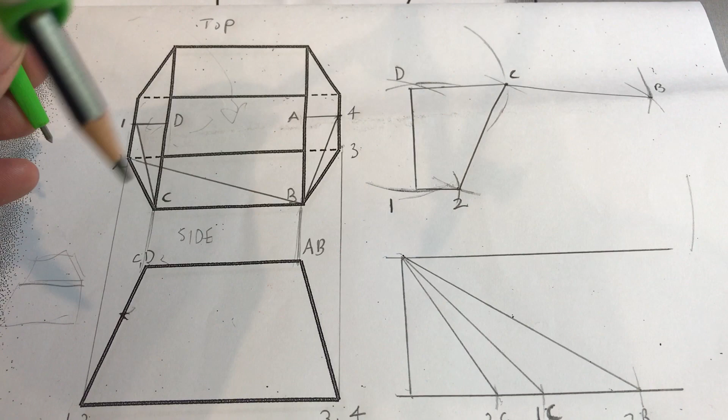Okay, it just becomes more and more convoluted. On these side views, I was saying your horizontals are verticals and your verticals are horizontals. But as you come around onto the other panels, that all switches around.

So you've just got to basically go from point to point and try and work out what are actual lengths and what are lengths that need to be transferred onto here to make them real lengths, okay, that are inclined planes.

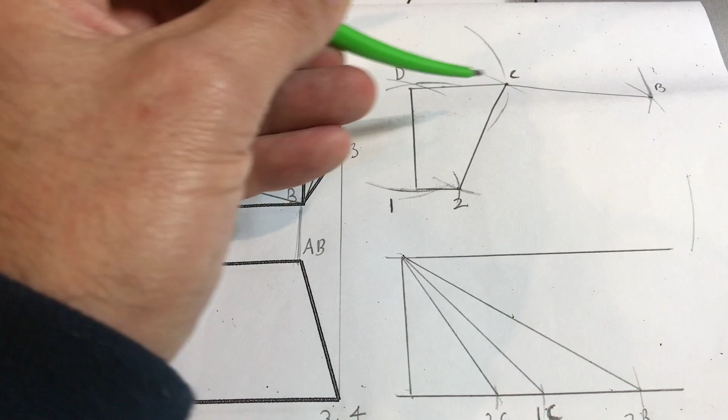So we've done our CB. We know that opposite CB we have this distance here, 2 to 3, which is a real distance.

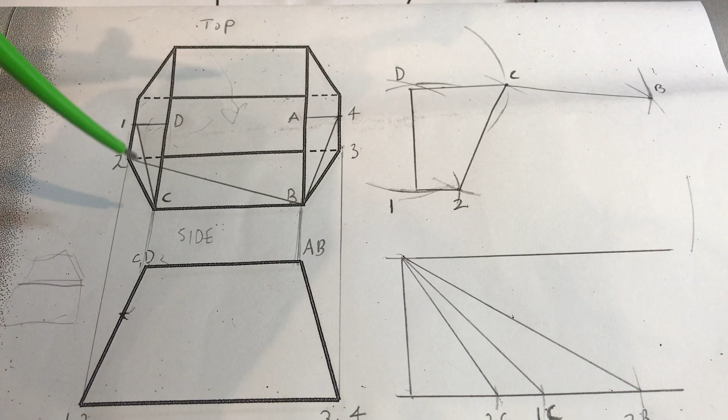So if we go 2, 3 here, we drop our thing down here and we can draw a line. I've already done that, I've already scored across here with our line. So we've got that 2, 3 distance in, but we need to get a second line, so we can swing the distance.

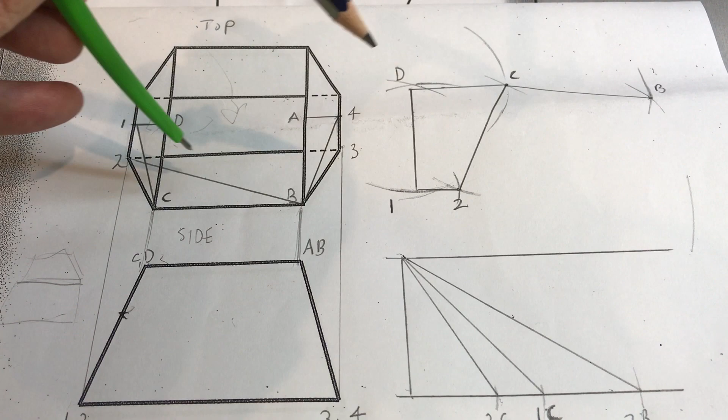So we need to get a line. Let me think about this for one second. We need to swing. We've got our 2B distance here, we've done our 2, 3. So we need to swing a line from B, okay?

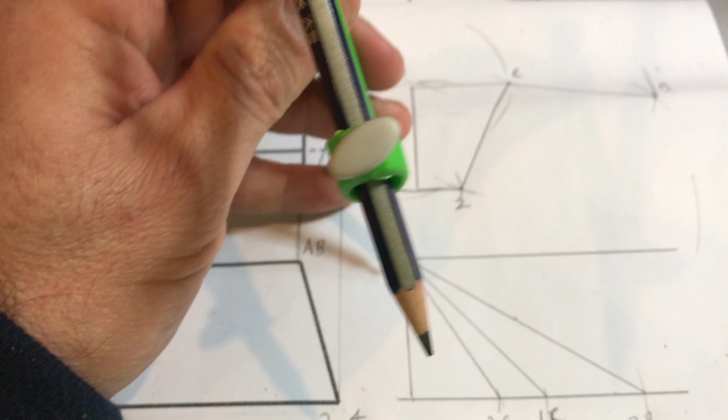And we have a 2B distance here and a 3B. So let's try our 3B distance, which you said was the same as 2C originally. So let's grab that because we're going to be swinging from B.

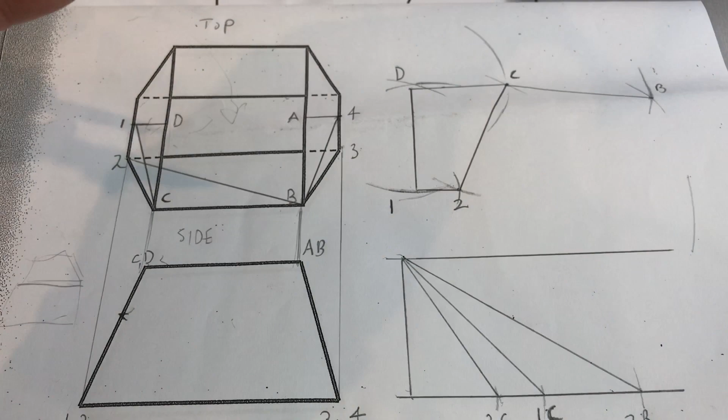So we'll get our, this distance here, which is the B3 distance. I don't know if you remember, we labelled it B3. And so we can stick our compass on B, and when we swing it across, we get a crossing.

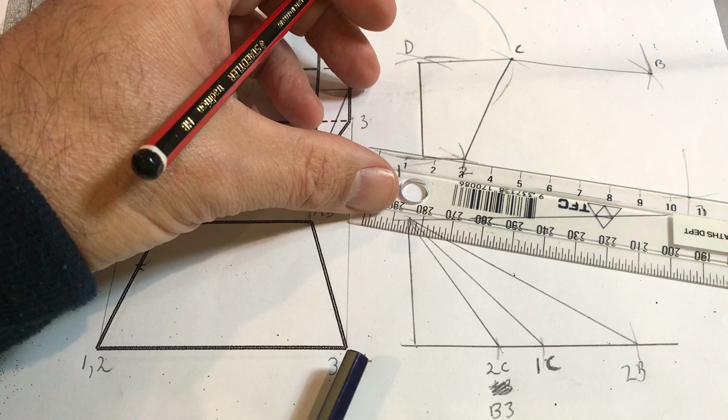Okay, so now we have the other line, which is 2, 3, down here. And if we draw that in, we've now got 2, 3, and we know that between 2 and 3 we have B and 3. Okay, so B and 3 is here. So we draw that in as well.

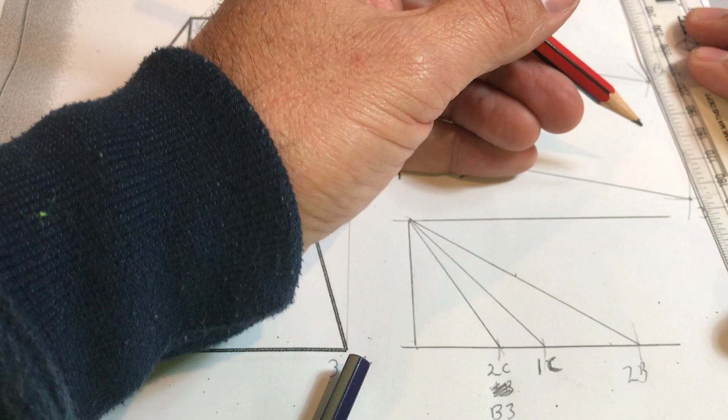I'm really working myself into a corner here. Let's make sure you can see what's going on. So B3 is here.

And then we've got our B3, we've got our 2, 3, our CB, our 1, 2. We're now going on to this side here.

And we know that just like 1D, our 1, 4 distance is also, our A4 distance is also a real distance because it's perpendicular to the viewer. Okay, viewer's sitting here. You know, Jack Spratt is over here. Hi. So his line of symmetry is this way, perpendicular.

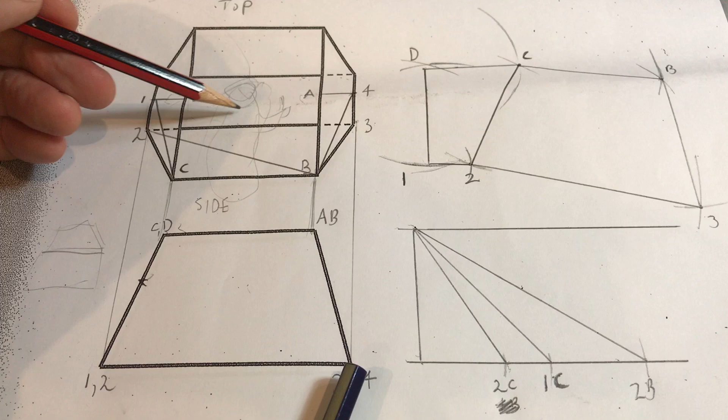Okay, so what we need to do is we need to get that real distance, the A4. And this is our last panel of the transition piece, and we're coming up to our line of the seam. Okay, so that's our A4.

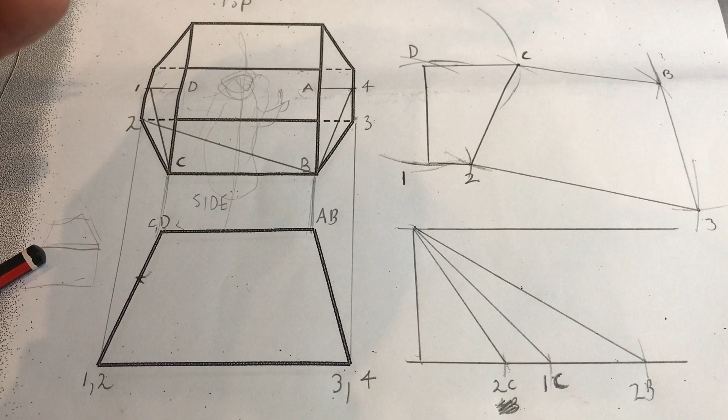So we can just grab that distance, that A4 distance, and we need to get it onto the diagram. Sorry, AB distance, sorry, so that's AB is going to happen next. Okay, this one here. So that distance here is going to be over here. So we swing it over here.

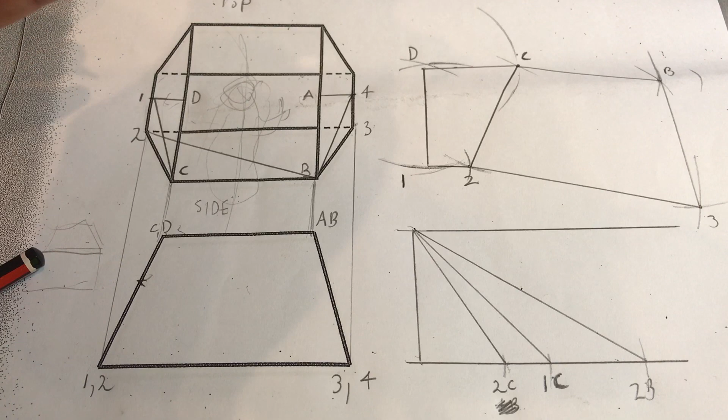What have I done? Hold on. We go 1D, so DC was this one. So, sorry, this is going to be AB, and we said AB was a real distance. So I've said a porky pie. AB is a real distance this way.

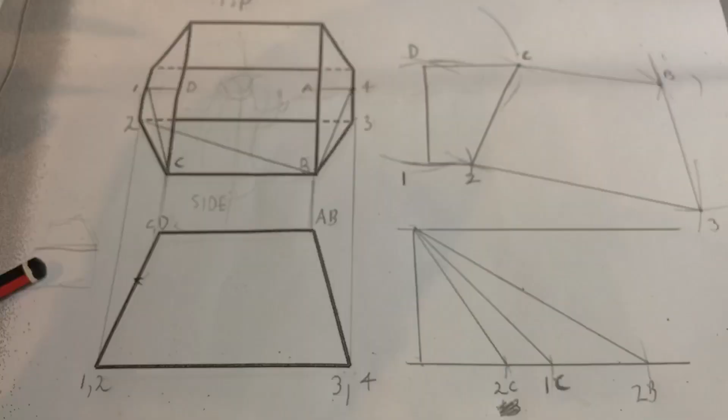Okay, so we swing it, and we're going to run a little bit off the page, I think. I'll just let you have a better view of what's going on. But we've done that as a real distance, AB, because on this diagram here, like I said, that's a real distance, AB.

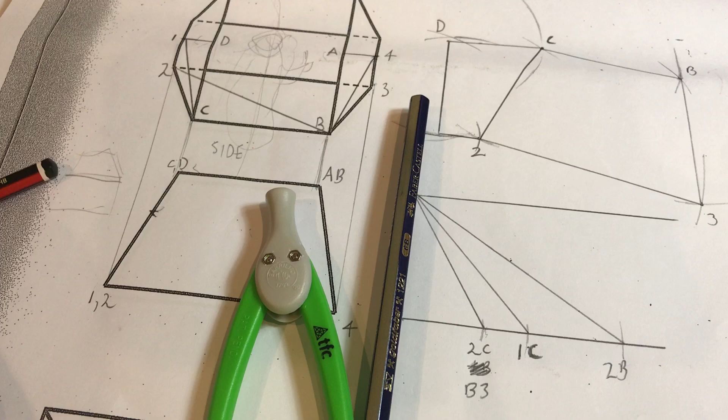Okay, so we'll get rid of that line that we put in there because it's not correct. And I will get a bit of white paper under there just so that you can actually see what's going on, because otherwise we're going to be a bit confused if we're not already confused.

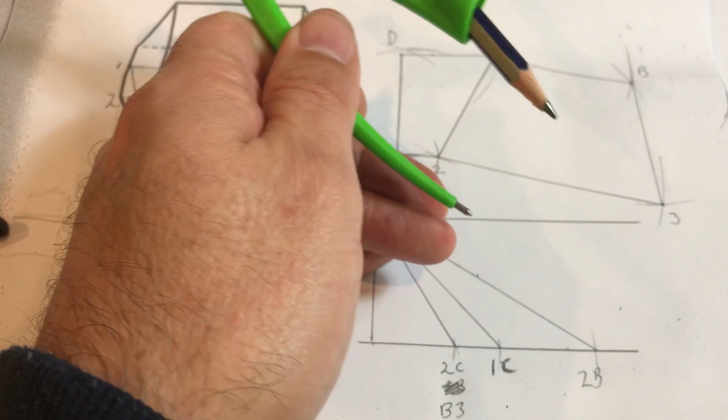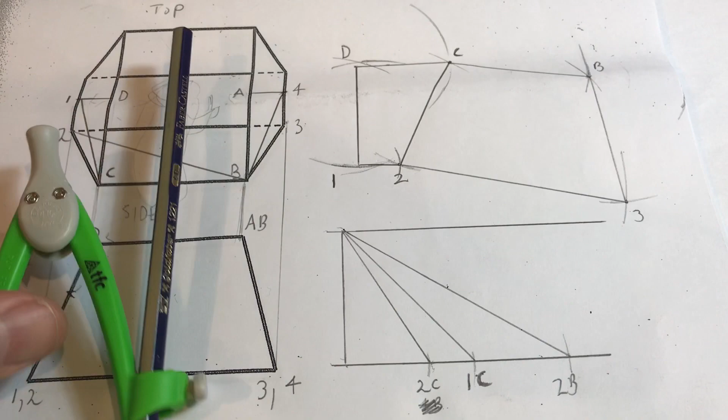So like I said, AB is a real distance, and we're going from B to create a line like that. Once we've done our AB, we need to swing one more line, and that could be this distance here, B4, or 4B, as the case may be. If we take that distance, it's actually the same as the 1C line, because you can see over here 1C is the same as 4B. We've already done a 1C line, so we can write 4B there and take that distance.

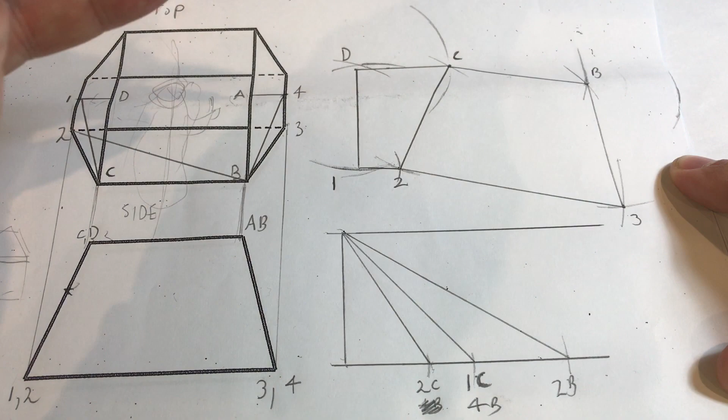When we take that from B... no, that's not going to work. We need to get a line with a 3 in it, a 3B line, and we take that 3B line across. We've got that last line we needed. So that's our B3, and this is our BA line that goes across to here, right on the edge of the page, as luck would not have it.

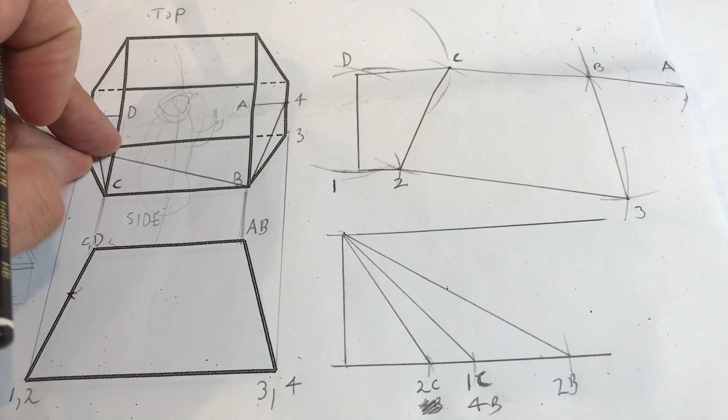When we draw that line, how do we know it's correct? One way of testing is to look at the line here, because it's a real distance, BA, on this diagram, and it should be about 3.5 centimeters. When I measure here, I get close enough to 3.5 centimeters, so we are on the right track. So we've done that BA line.

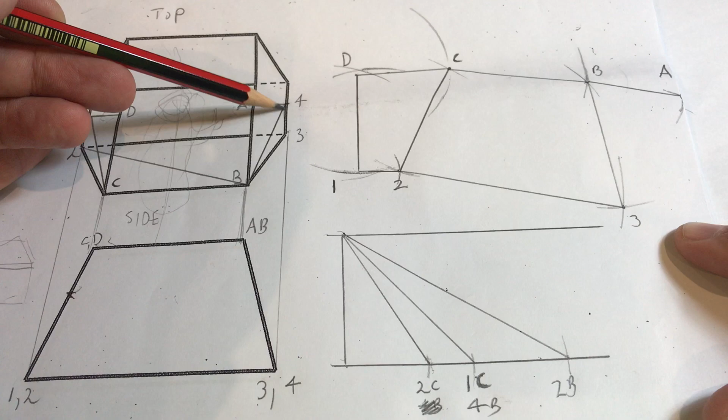Now we need to do the 4-3 line, and that's a real distance, 4-3. On the sides, as we noted, the verticals were horizontals, so that's a very short line. So we can do that with it, and get our line happening this way.

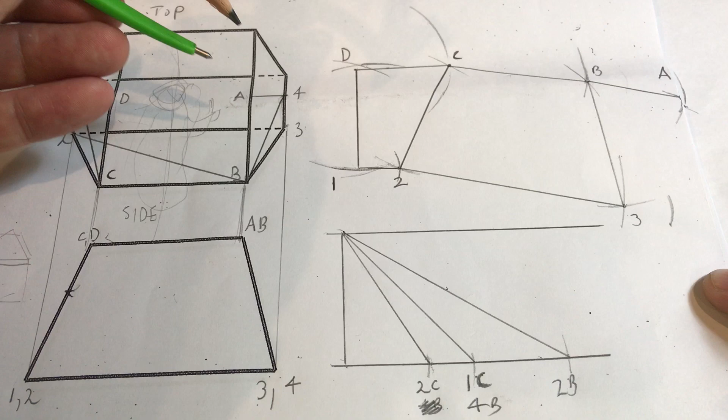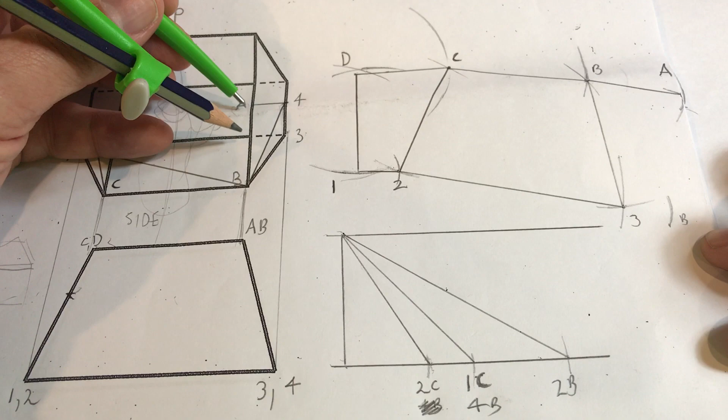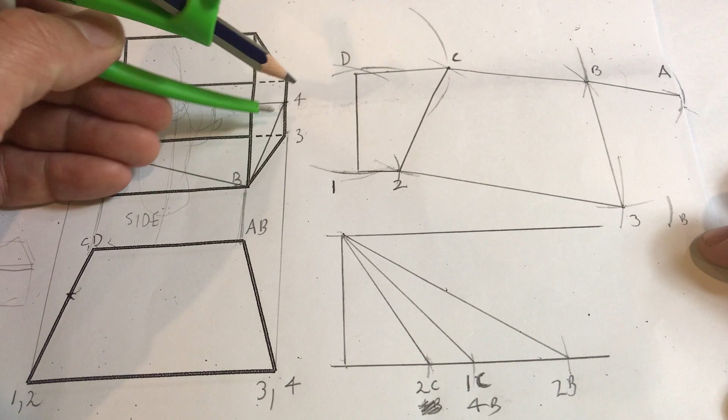Then we need to swing one more line, this goes 3, so we've gone BA, we've gone B3, and now we need the last line, which is AB, between the two. We need to swing a line this way, so it's got to have a 4 in it. So it might be this line, this triangulation here, B4, that we need, which is this one here, 4B.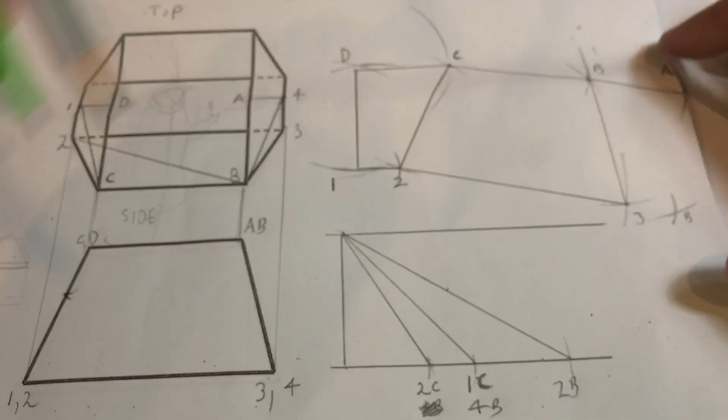So when we swing this line here, we've got our lovely crossing point, and we can draw a 3B. You can draw a dot between where those two lines meet too, that sometimes helps.

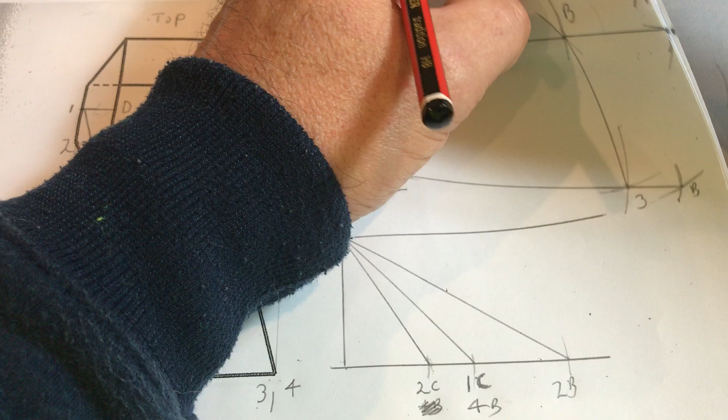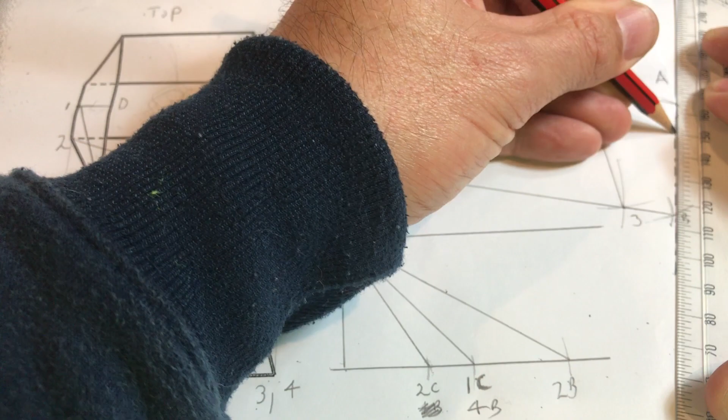We finish off our construction with this line here, and then the line joining A and B is our transition line. So just remember, when you draw your transition line from point A to point B, you do the broken line, like a center line for a technical drawing, which is dots and dashes, and then either side those two dashes.

Okay, so that is our three-dimensional transition piece. It's a half transition for this shape here. Sorry if that was really convoluted. Like I said, you've got to jump from point to point, and you've got to do a few of them to really get your head around them.

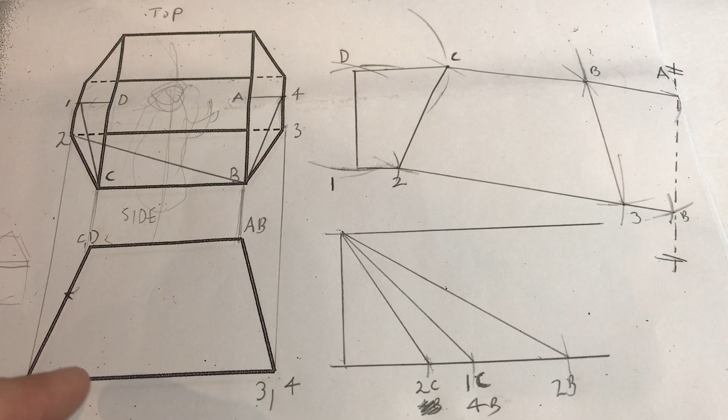If you get an exam and you get a question like this, I would say leave it till last when you've got plenty of time to do it. Do your labelling, get these real distances down, get this labelling of the side view and the top view done, and that's most of the marks.